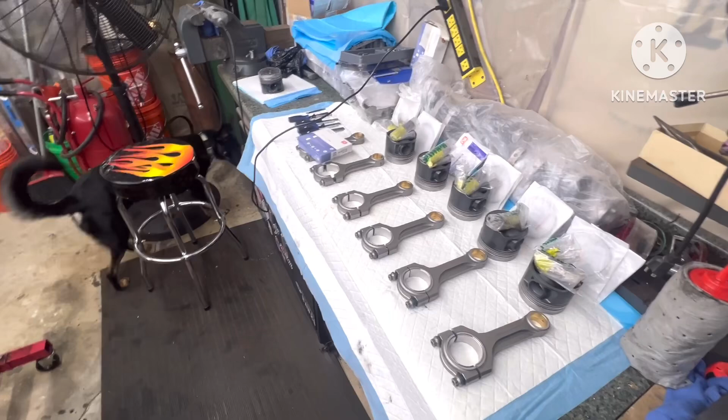We finally got our engine back from Opel Engineering after close to 10 months at the machine shop. Not really their fault for the time frame though, it was more so just waiting on parts, finding dimensions and specifications to make sure everything was set and correct. But we finally got it back.

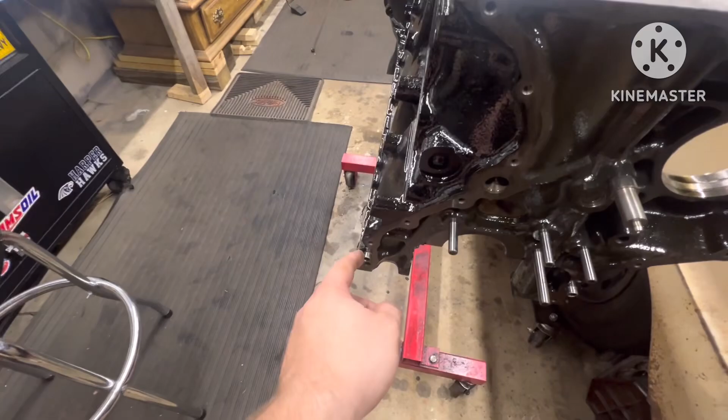Everything's balanced, got the crank polished, got the head and the block decked. One thing to note is when you get your engine decked, make sure to include the front cover to have them cut it all at one time. If you don't, you'll go to put your head on and it won't fit. The front cover is located with these two little dowel pins, so there's not much play that you can mess with, if any at all. Make sure that you're including that and that they cut it at the same time.

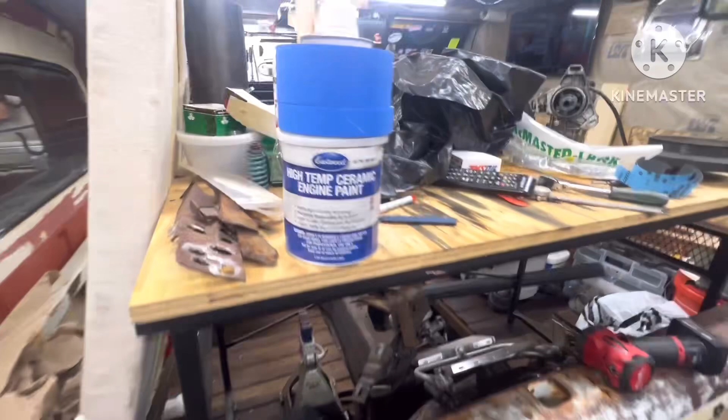I do have the block already painted. I'll put in a little time lapse of doing that when we start getting into some of the assembly. I had them oven bake the block, then I cleaned it up and painted it with the high temp ceramic engine paint by Eastwood with their activator.

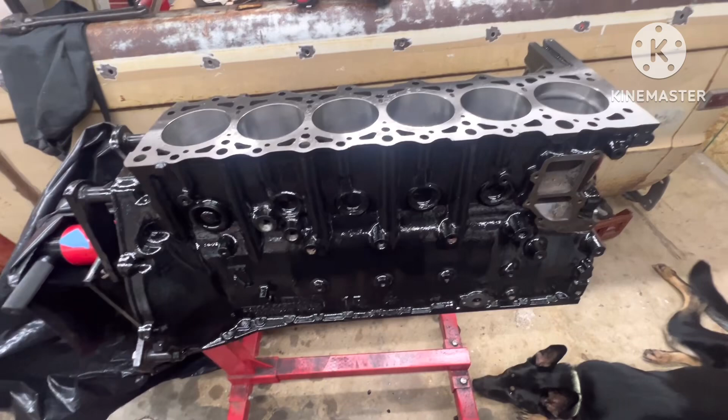Came out extremely nice. Any sort of imperfection in the block was honestly just from the block casting, not from the paint job itself. It leveled out extremely well and it's extremely hard and durable now.

I actually applied it with just a simple chip brush, real cheap. Make sure that you pick out any of the hairs that may come off during painting. I found it to apply much better with the chip brush than a foam brush. I tried starting with the foam brush, but it just wasn't laying out as nicely, it's a little too thin. You were able to get a bit more paint on the chip brush than with the foam brush.

The nice part about this stuff is if you do miss spots and it hardens, you can just scuff up the surrounding area and paint right over it. I'm most likely going to have to do that, I did miss a couple spots here and there. Same thing on the front cover, and as well as when I do the water pump housing and the neck and some of the accessories, I'm going to have to paint those at the same time, so I'm not worried about any little spots I miss. At the end of the day, the truck is going to be a driver. I'm trying to make everything as nice as possible, but at the same time I'm not going to lose my mind, or at least try not to, while putting this thing together.

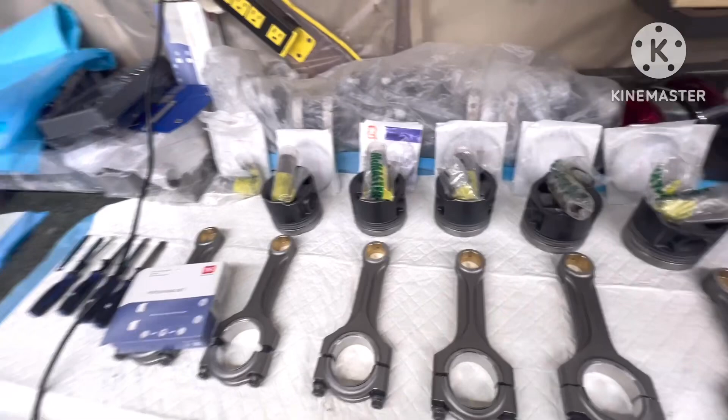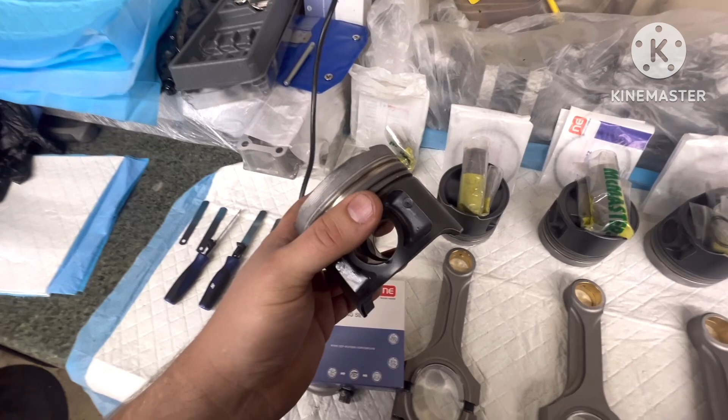So we've got all of our pistons and rods laid out. Everything is balanced and marked to make sure we're putting them back in the correct place. I did have to have my piston skirts coated because the piston to wall clearance was pushing after it was honed, almost 4 thou, 3.5 to 4 thou, which probably would have been okay, but I'm keeping this engine for the long run so I wanted to make sure it's right. Right now with the coating, it's sitting right at 2 thou, so we're good to go on that.

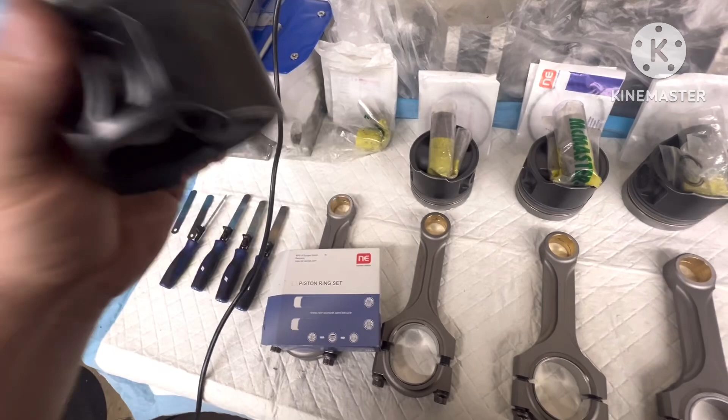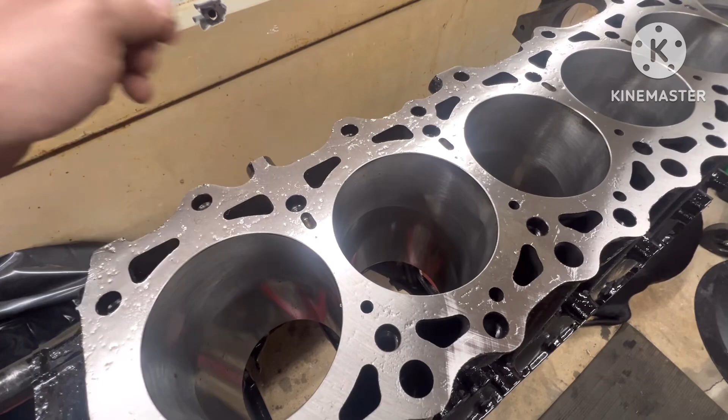One other note, when you're assembling stuff you want to try to get lint-free rags. As you can see, when I was applying some oil onto the surface, this is not imperfections in the machining, it's actually little pieces of lint. That was my bad, but it's okay, we're going to clean everything down with brake clean to make sure it's nice and fresh when we start assembling everything, so I'm not too worried about it. But make sure you get some lint-free rags.

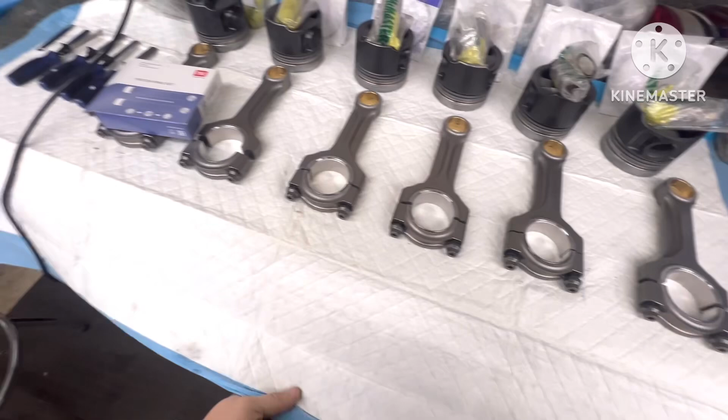A little hack is to actually get some pee pads for dogs. These work great, and there's almost no lint to them. Gives you a nice clean work surface so you can lay everything out and make sure everything's set.

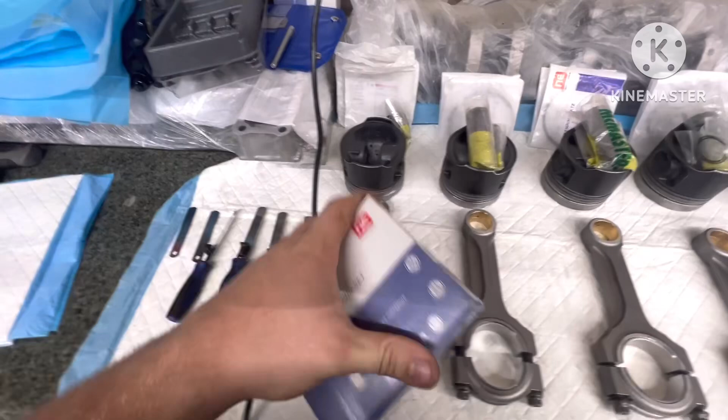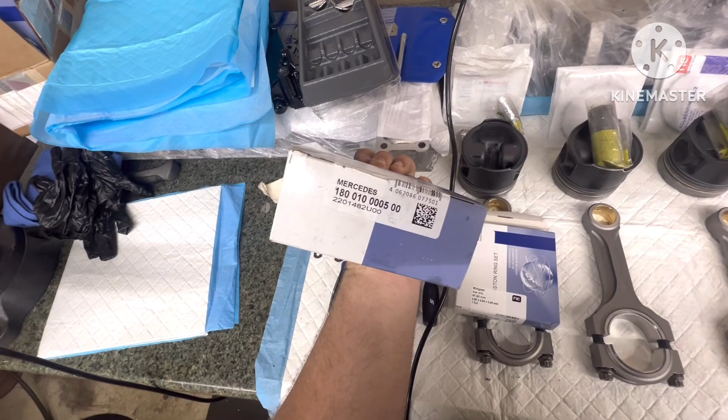We'll go over part numbers as they come up. This is the part number for my rings. It's an aftermarket company, but from what I've read on the internet, everything's great with these rings, no issues. Same thing with the engine bearings. The mains are, here's the part number for that, and then I'll have to find the box for the rod bearings. We'll go over all that.

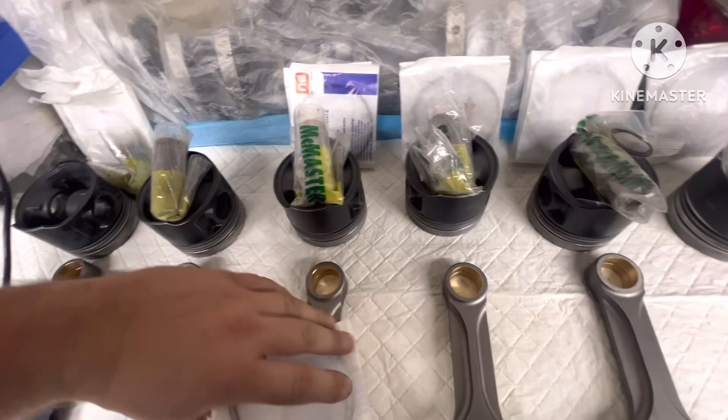I'm going to start setting my piston ring gap. We're going to go 20 thou on the top ring and 25 thou on the bottom ring. I'll pull these guys out. Our top ring is the square side, that's going to be 20 thou, and our bottom ring is going to be 25 thou. The reason you do that is there's a bit more heat in diesel engines while they're running, so you actually gap the second ring a little bit looser than the top ring to accommodate for that heat expansion.

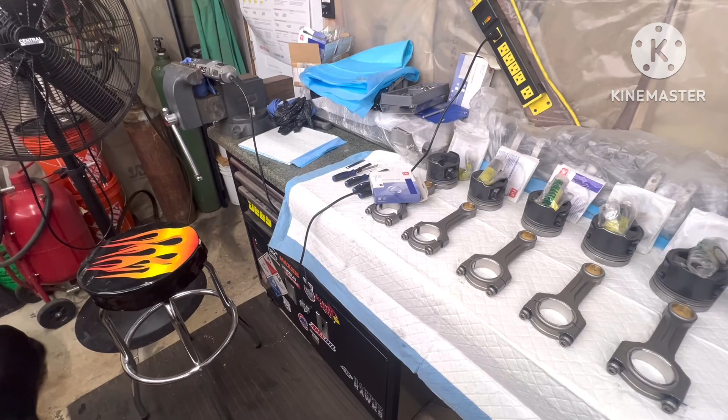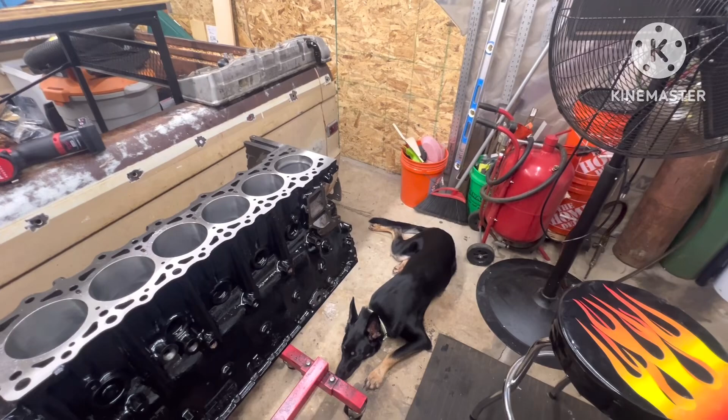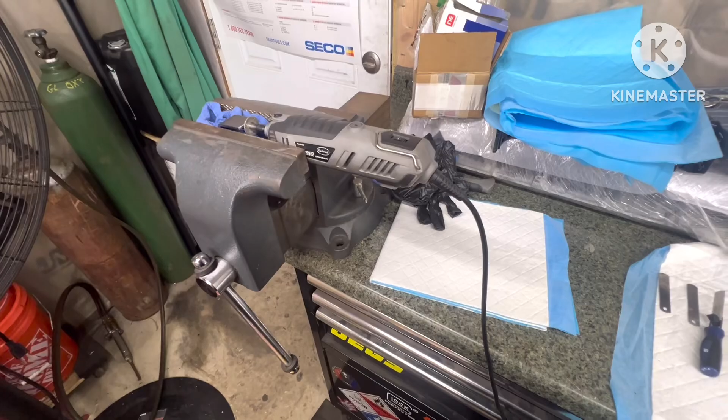So we're going to start working on getting these filed down. I'm going to start with my awesome, super precise ring grinder, put it at a really low speed. I'm going to try one, hopefully it goes smoothly. If it does, great, we'll finish off the rest this way. If not, then I'll get one of those hand crank ones, because right now the ring is at 16 thou for my ring gap on the top. So we've got to take off 4 thou, 2 thou per side, but we'll just knock it down on one side. It'll be fine. Hopefully I can manage that, but we will see.

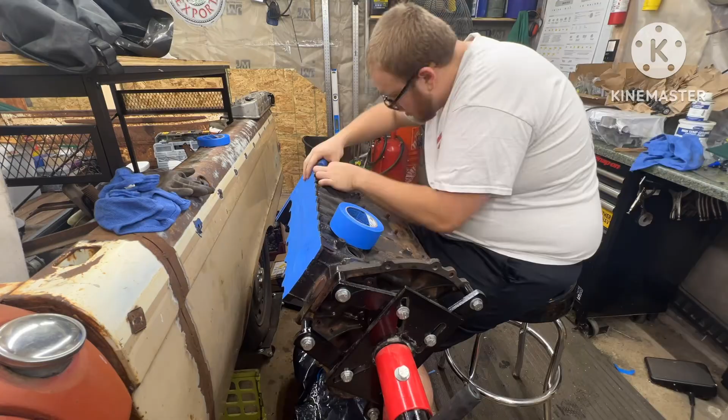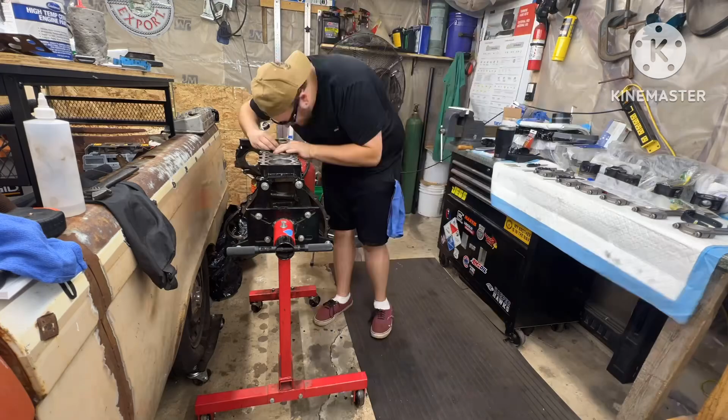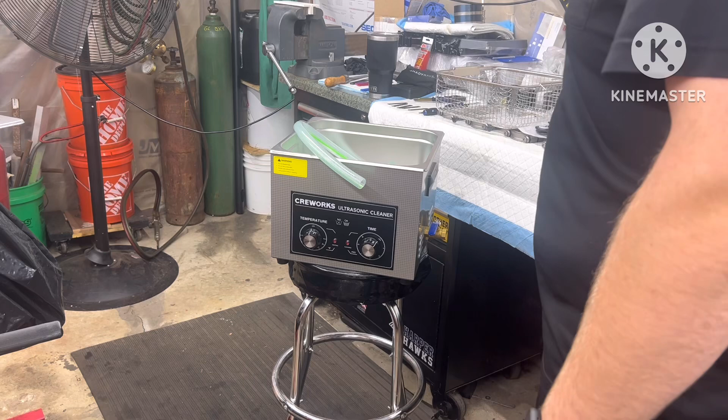So guys, I got this ultrasonic cleaner to try and clean some of these parts as well. It was an Amazon special, about 160 bucks. This one seems to be the best option. The Vevor options out there seem to be kind of hit or miss, whether they actually work, or I should say the repeatability. I've seen lots of comments where it works great for the first couple times and then they fail. Most of the time I saw it was because of the electronic digital control panel. This one is just old school knobs. So we're gonna try this guy out.

It wasn't too bad. Archie's definitely excited about it, but it's kind of funny, the shop is turning into something else. It looks like a surgery's going on. Now we're in a food kitchen, we're serving a can of whoop ass or something, but we're gonna give it a go. I'll show you the parts before and after and see how they come out.

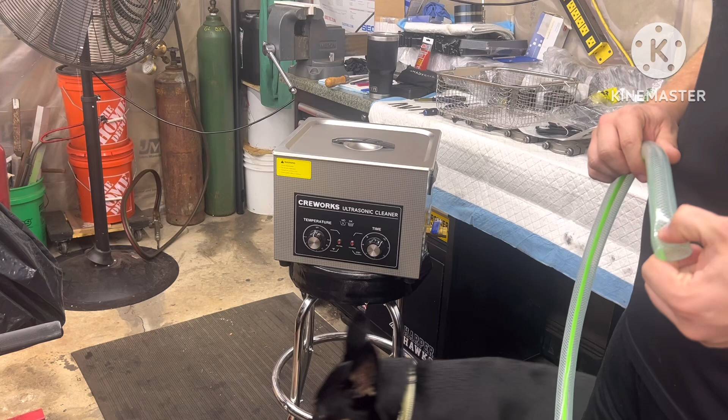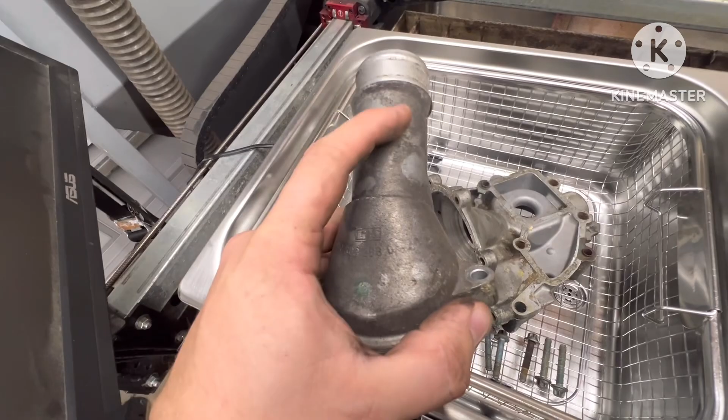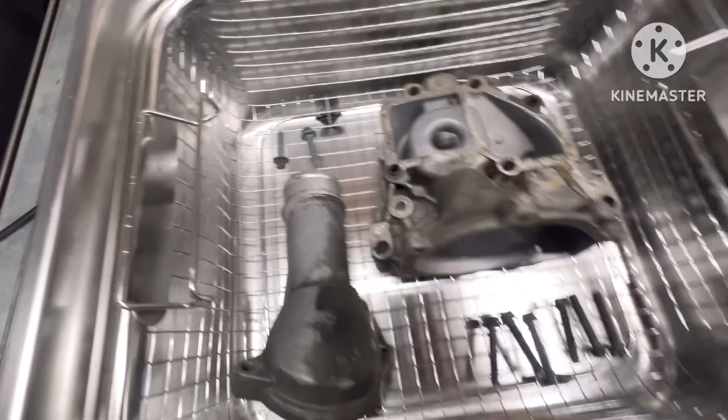Alrighty, got this set up here. This is kind of what the parts look like, not terribly dirty, I think they're gonna clean up nicely, but still gummy nonetheless. The bolts are honestly dirtier than anything, and we're gonna try running some PSC 1000. This stuff has worked out pretty good for me so far. One of my co-workers recommended it to me and I really like it. So we're gonna try it in here and see what happens. It's definitely doing something.

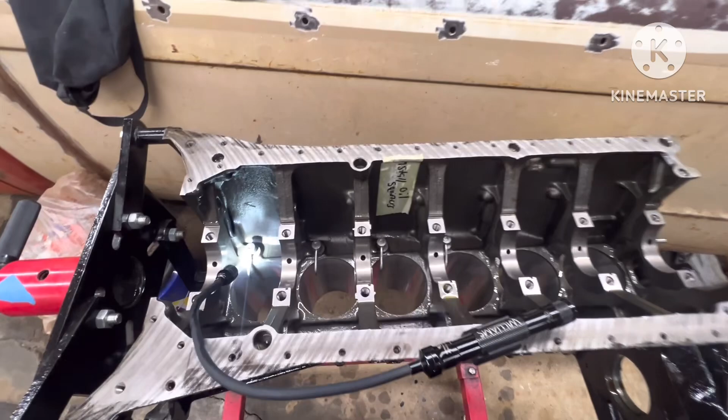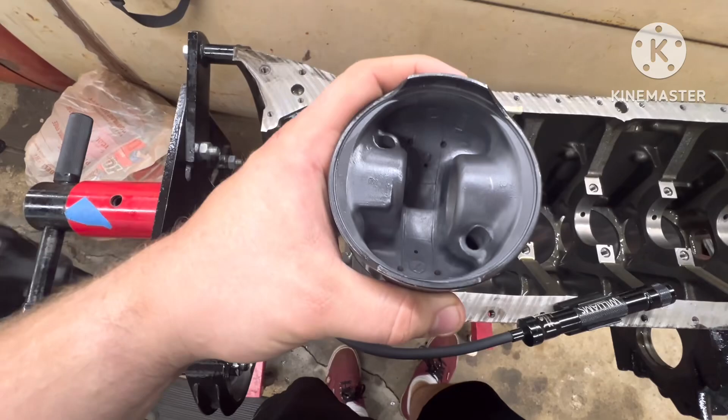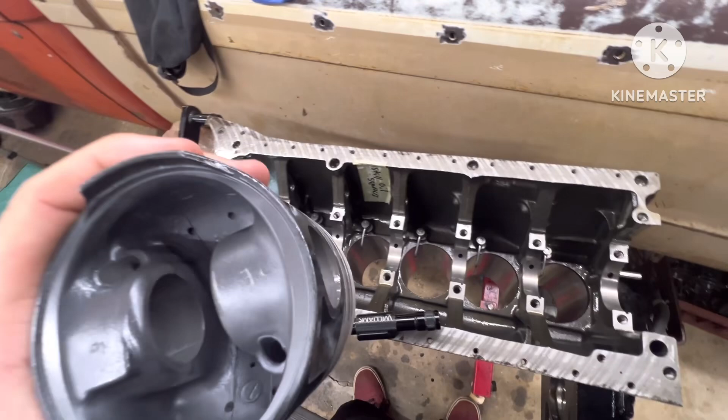Alrighty guys, I got my oil squirters installed. My engine builder put a nice little note in there for me. One thing to note is to make sure that you put your piston into the bore and that your oil squirter aligns into that hole, this one right here that I'm pointing to. If you don't, you're not going to have adequate cooling for the head of the piston, and you want to keep this piston as cool as possible, especially if you're running any sort of aftermarket injection pump and turbo, because the more heat, the more likely for pre-detonation slash cracking of a piston, and that's just not good.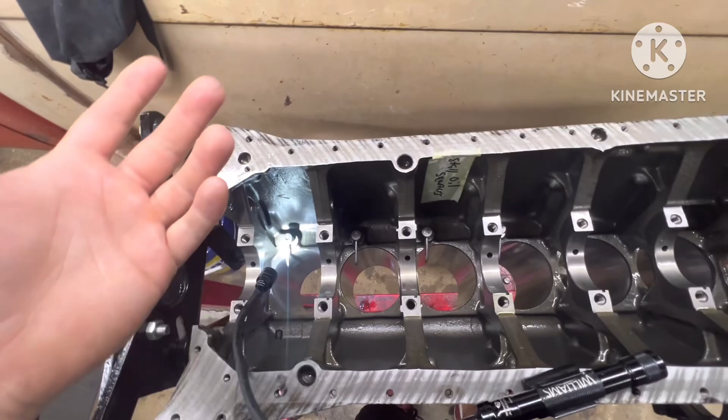So we got those lined up. That was a real pain, in all honesty. These oil squirters are actually pressed in, or in my case, I used a nice big brass hunk and just peened it in. These little Harbor Freight hammers are honestly the best, they're like $3 and I use it all the time. So I just essentially got it lined up the best that I could. I tapped it in a little bit into the bore with a smaller piece of brass to get it lined up, checked my alignment, made sure it was good, and then started hammering down.

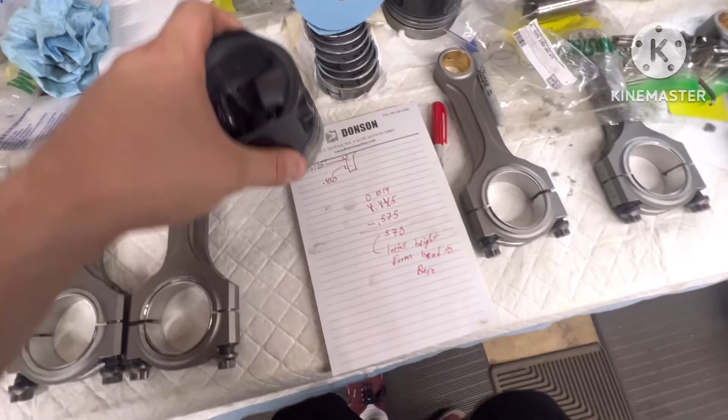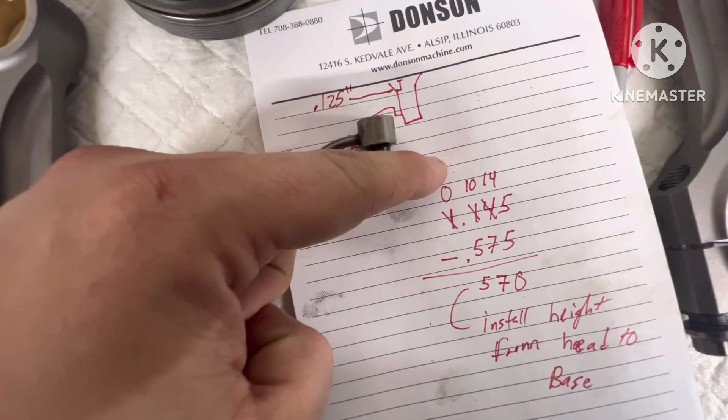One thing to note is to grab the dimension before you pull them out of the block. You want to measure essentially from the top of the head to that flat face right here, so that you have an installation depth.

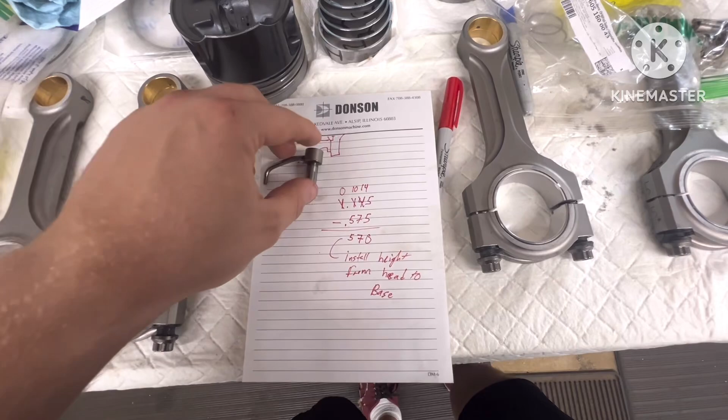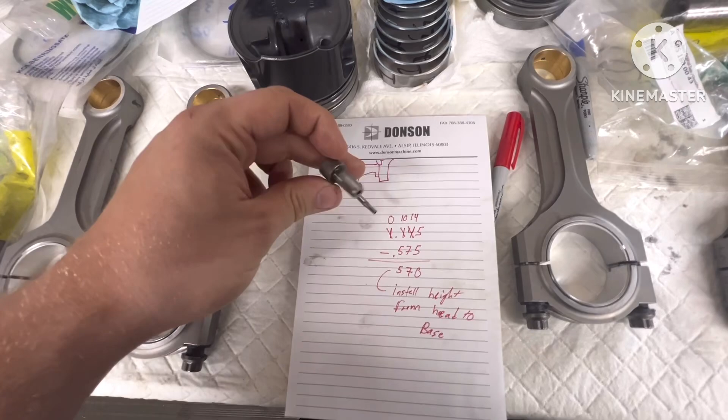Unfortunately, I goofed and forgot to grab that dimension before I actually pulled them out, and I had to make a custom holder out of some 17-4 H900, really strong stuff, so it wouldn't spread apart. I'll show you that in just a minute.

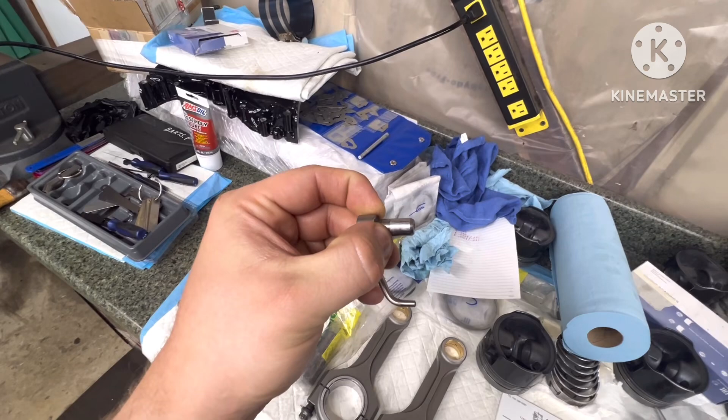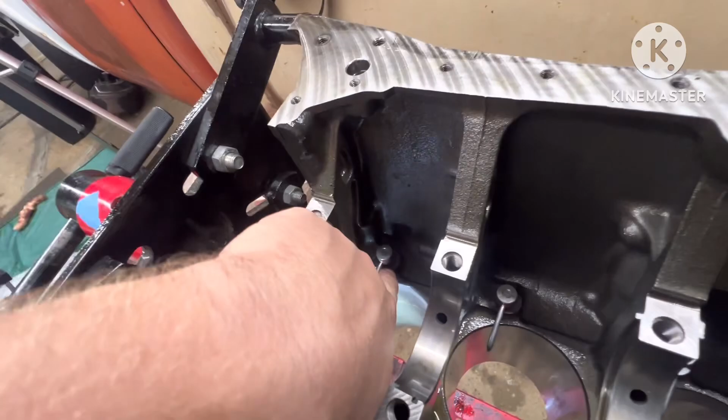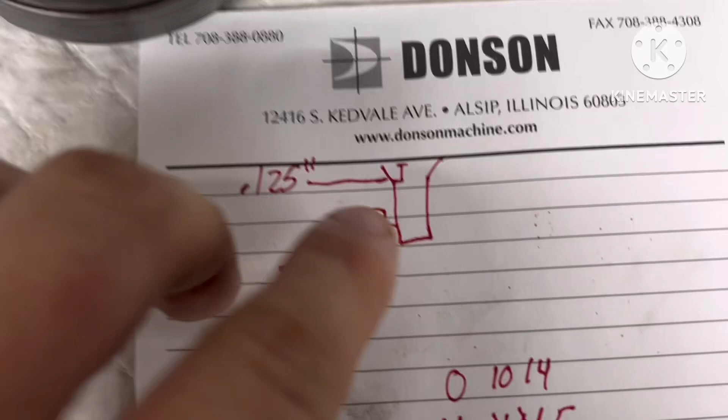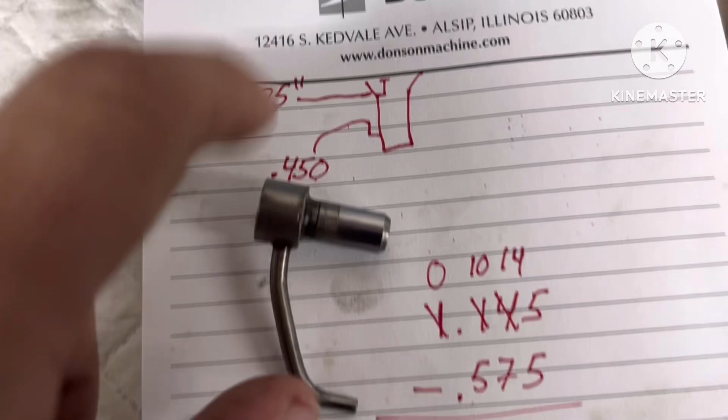You can see there's that line right there. I just measured the distance from that line to the edge of the oil squirter. There's also a chamfer in the block, roughly 125 thou. The distance from that line to the bottom was 450 thou in mine, plus the 125, so 575.

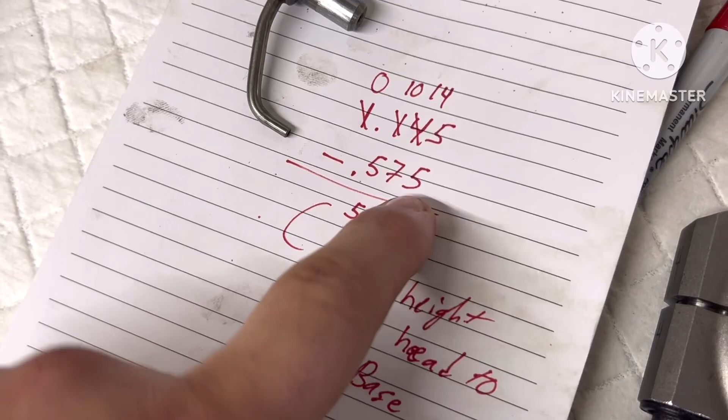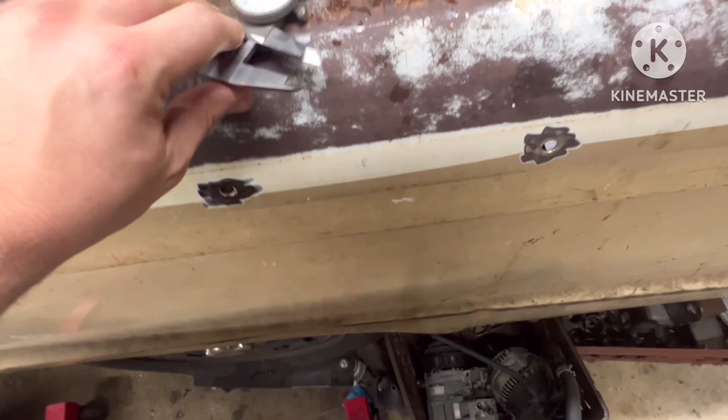I took the overall length, 1 inch 145, minus 575, gave me the 570 install height. So I grabbed one of my spare calipers, set it to 570, and periodically checked the distance from the face of the block to the top of the head, which told me how far the oil squirters were installed.

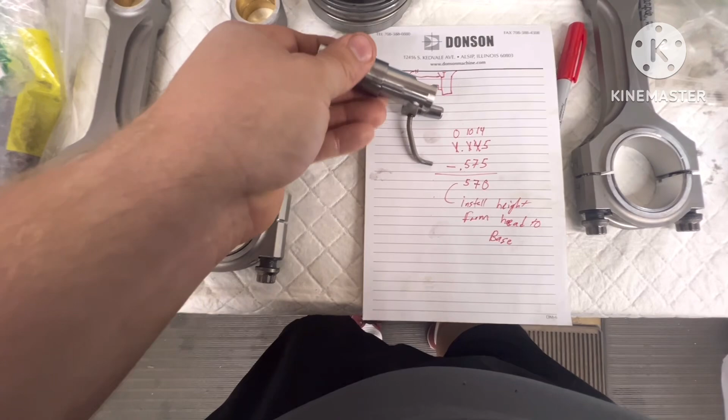This is the custom tool that I made to pull the oil squirters out of the block. It's kind of like that shape of the profile, and it slides over the head. This is a little retaining collar that has a groove for the oil squirter nozzle to clear, and this guy right here attaches to a slide hammer.

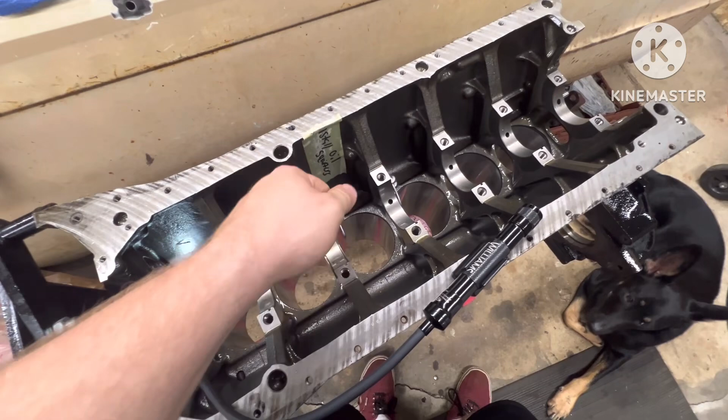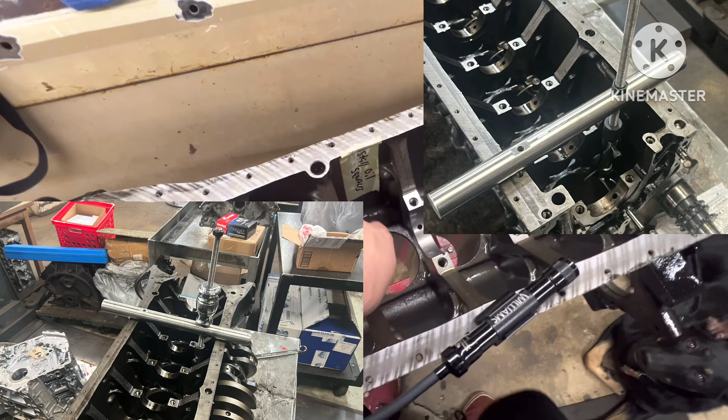In my case, I actually ran a bar across the bottom deck of the block and put tension onto that oil squirter with a piece of threaded rod, then used my slide hammer to impact it and pull them out. These suckers are in there deep, it's a really tight press fit, but that's what I ended up doing.

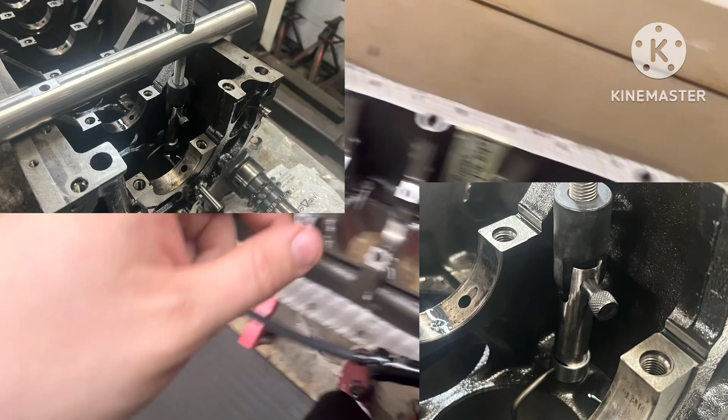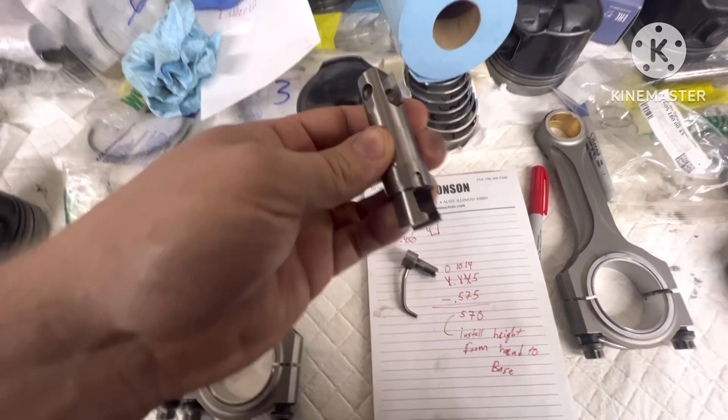I'll insert a picture of the little tool that I made with the adapter. I think you can maybe buy these still - if you search through the Mercedes manual, there is a part number for this tool. I don't know how much it is, but for something you're only probably going to use once, you may just want to try and make it. That's what I would recommend doing.

Now that I got my oil squirters in, we are going to put our rings onto our pistons, get everything nice and clean, reorganize, get everything laid out nicely, and then probably set our crank in and then set our rods in.

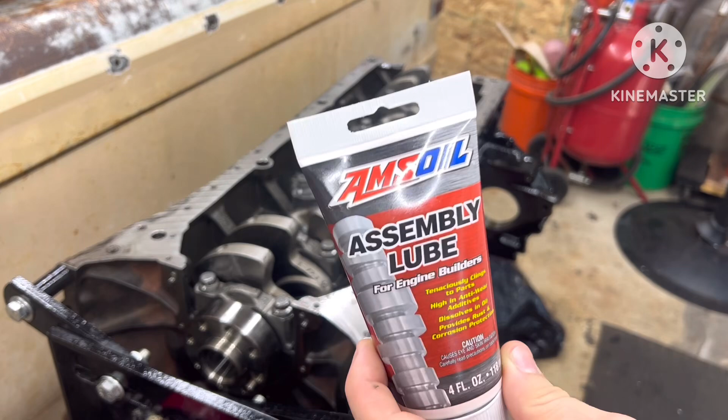Alright guys, so I'm going to start torquing down our main caps. I forgot to press record when I actually set the crank in, but I made sure all the surfaces were clean, and then I threw down some assembly lube. This stuff goes really, really far, so you don't need to glob it on there, it really spreads.

The Mercedes manual says to start at the thrust bearing and work your way out. So we're actually going to do it in 3 stages. The torque spec is 55 Newton meters plus 90 degrees, but we're actually going to go 25, then 55, then the 90.

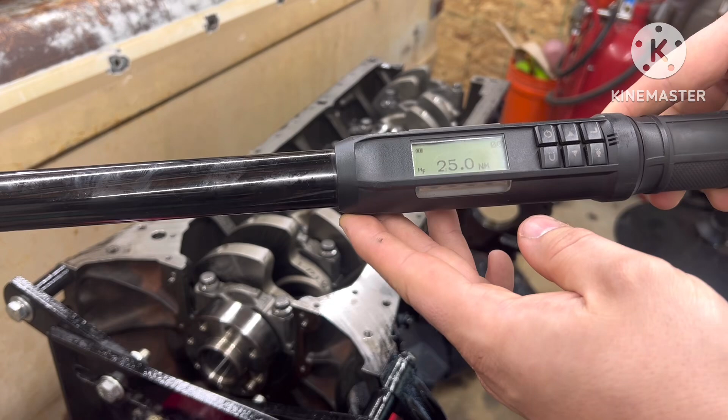It's probably not necessary, but it'll just more so give peace of mind for myself. We got the good old Snap-on tech angle - as you can see, got it set at 25 Newton meters. Shout out to Marcus for lending me this. So we're going to start off with the thrust bearing.

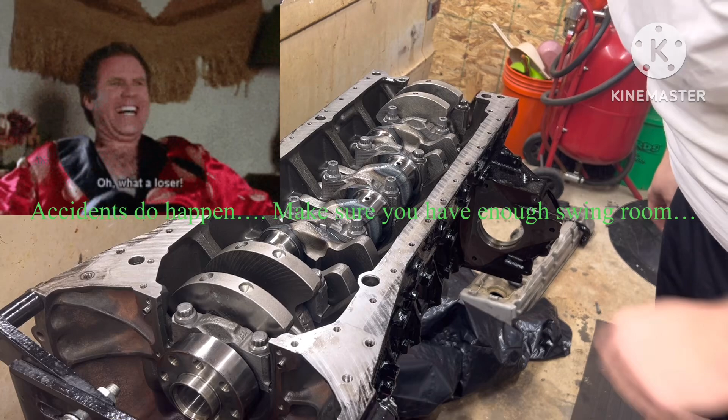No interference issues. And then we're going to grab a paint marker, and just for sanity's sake, we are going to mark all of our main cap bolts with a line onto our actual caps. Then we're going to set our angle to 90 degrees and go 90 degrees, making sure to verify from the initial mark that we are at 90 degrees.

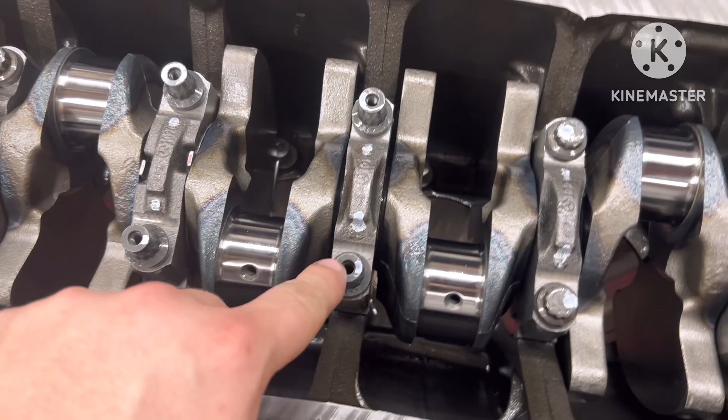I highly recommend that you mark the caps, even if you have a fancy torque wrench like this, simply because I almost goofed and did this one twice. I double checked before pulling it, because without these marks you'd have no way of knowing if you actually went 90 degrees. These aren't the cleanest lines, but I'm relying on the torque wrench to ensure I did go 90 degrees. This one looks a little off, but the torque wrench said 90 degrees - I heard it beep, I'm fine with it. Same thing with this one, it kind of spread out because of the oil on there. But definitely mark your bearing caps and bolts before you do this sequence.

It's extremely important that you follow the specification. Again, one finger - there's a little bit of drag, but that's just from the assembly lube on the bearings for startup.

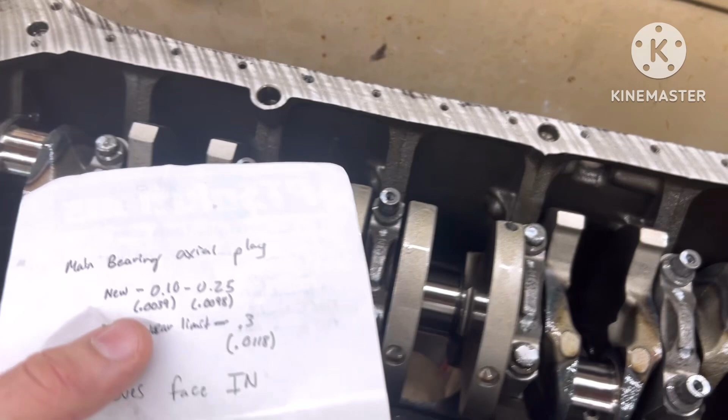One thing we're going to have to check is the axial play in the crankshaft. What we're going to do is grab my dial indicator, throw it on the end of the crank, put a little pry bar in, and see how much play we have axially in the crankshaft. The specification is right there.

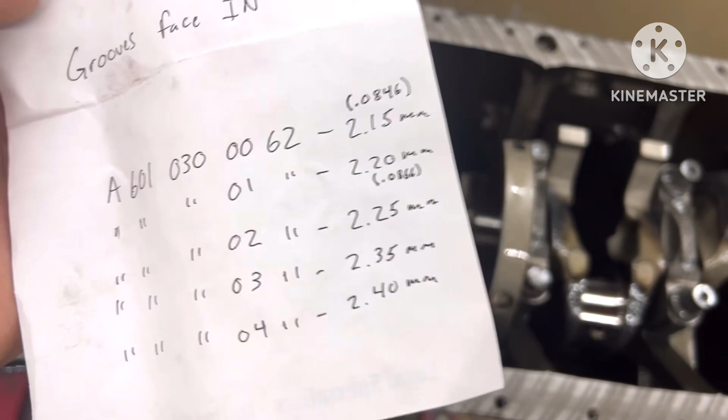These are the thrust bearing washers - they're actually bearings that go right here. The nice thing is, say you have too much axial play, you can pull off this cap and replace the thrust bearings. You have to kind of fish them out, but you are able to change them out if you have to.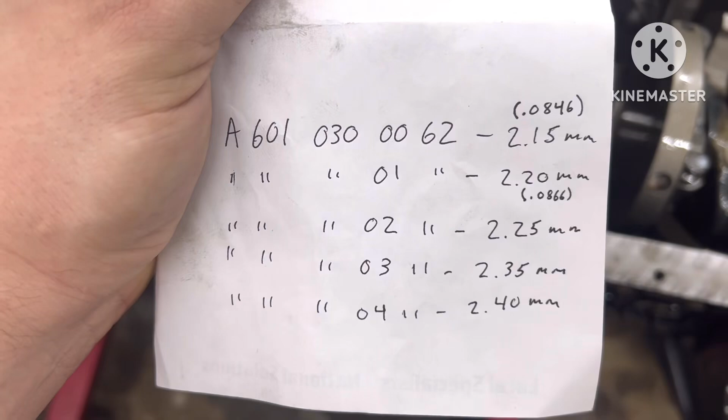It's no big deal. These are the part numbers for the different thicknesses. From factory, this one had the -01 in it, so that's what's in there right now.

We're going to measure out that axial play with the indicator and see where we're sitting. So we're sitting right at about 5 thou total - that's almost nominal, a little under nominal. I'm probably just going to leave it, that seems like a good fit. It's got a good sweep. I'm not using a giant pry bar or anything to get that, so I think we're good to go.

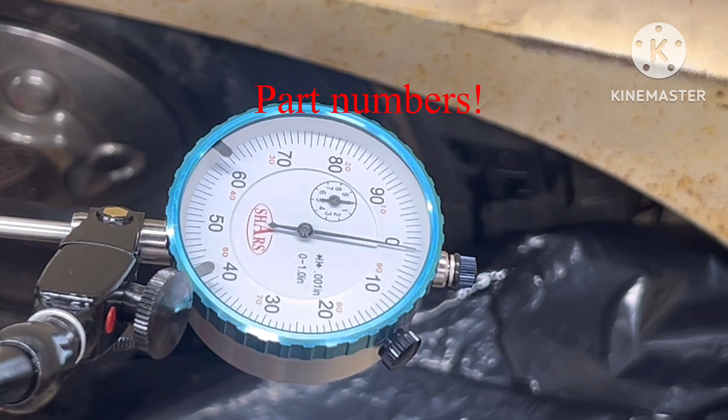Everything spins nice and smooth. I think we're going to set our rings onto our pistons now and start setting pistons in.

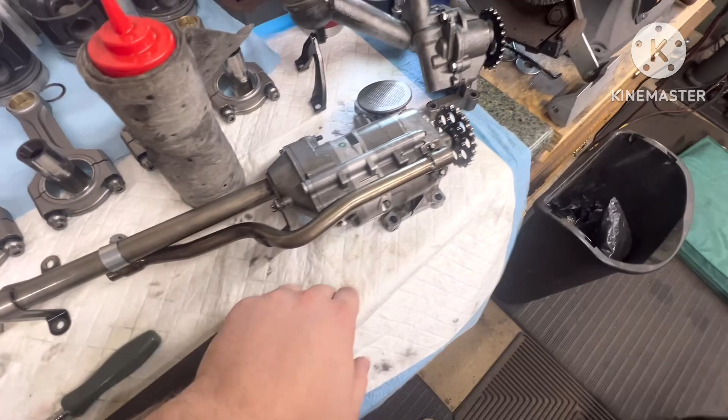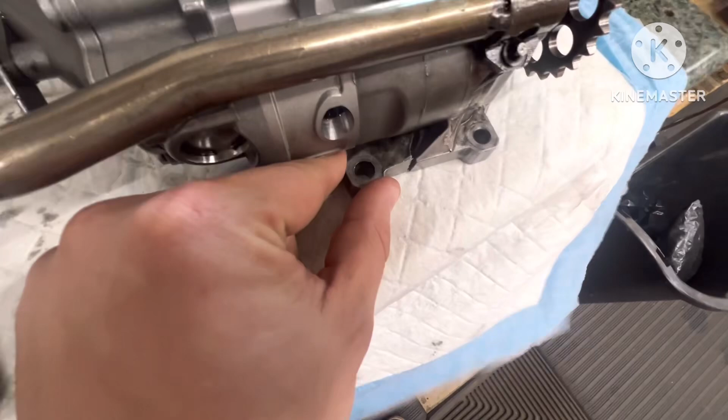Found out some bad news when I was going to pull out my rear sump oil pump - this little ear actually got cracked off. So what we're going to do is cut a little bracket that goes from this hole to this hole. This is going to be a support, and then we're going to prep and weld this the best we can to try to fix it, and leave that little bracket down that we make to get it in line. We're going to leave it, and get a new bolt to compensate for the thickness of it.

When you're storing parts on a long-term project, make sure that they're packaged well and that they don't get damaged. That was a real bummer, but it is what it is.

These pumps are super expensive if you can find them. I got a deal on one with the rear sump pan quite some years ago. This actually may have been cracked then - who knows? But it is what it is.

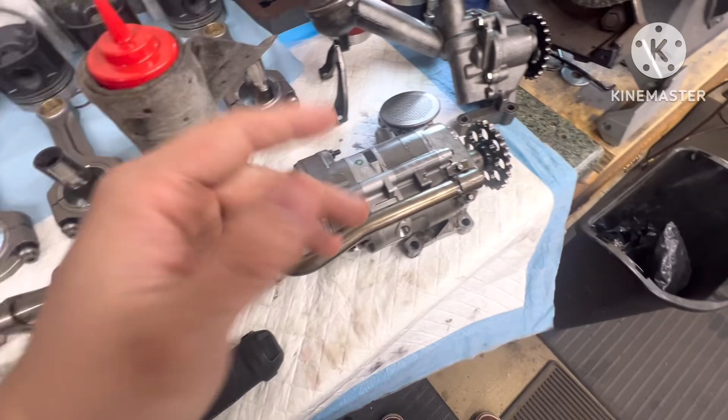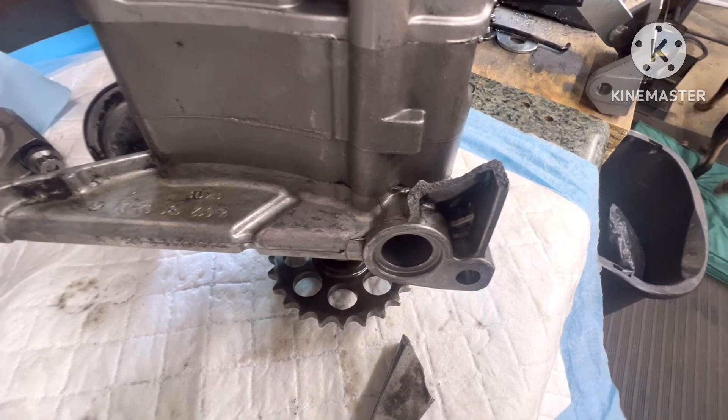We're just going to go forward and do the best that we can. It really sucks because your actual inlet or outlet from the oil pump to the rest of the block - that's your galley hole. So you want to make sure this is fully pressed down and that you have full support so you don't have an intermittent oiling issue.

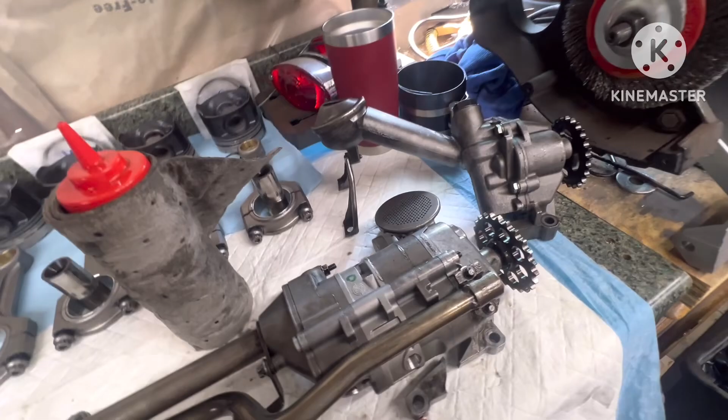We're going to pray that our fix solves the issue. This is the original pump for the front sump - it looks like they actually had this a bit thicker than this one. Here, I'll slide that up there. So they may have actually had issues with that before - who knows? But it is what it is. We're just going to do the best that we can.